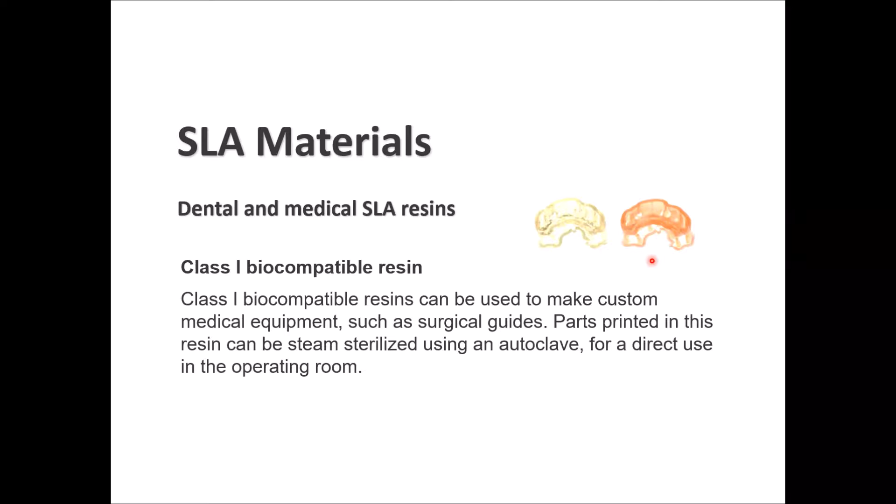This resin can be used to make customized medical equipment like surgical guides, and the parts that we print using this resin are usually steam sterilized using an autoclave so that they can have a direct use in the operating room. We can see here on the right some of the parts printed using the SLA 3D printing technology with the Class 1 biocompatible resin.

The Class 1 biocompatible resin has ups and downs, similar to any material you're going to use in 3D printing. The good side of this material is that it can have high precision when printed, and in addition to the high precision, you have a smooth finish as well, a smooth touch on the surface. The bad side is that it has moderate wear and fracture resistance. So it will not do a good job if your application involves repetitive forces that can cause wear, or impact forces that can cause fracture.

The next material is the Class 2 biocompatible resin. This resin is engineered so that it can handle long-term orthodontic applications. Class 2, also known as Class 2A, is a biocompatible resin. It can be in contact with the human body with no problems for up to a year before this material starts to break down, and before that moment, it's still biocompatible.

The body will not reject it, because when you have a part in contact with the human body or human skin, you want to make sure that the body doesn't fight back against this material as a foreign material. So this Class 2A biocompatible resin can do that job for you, but it has a limitation that after one year it will be degraded.

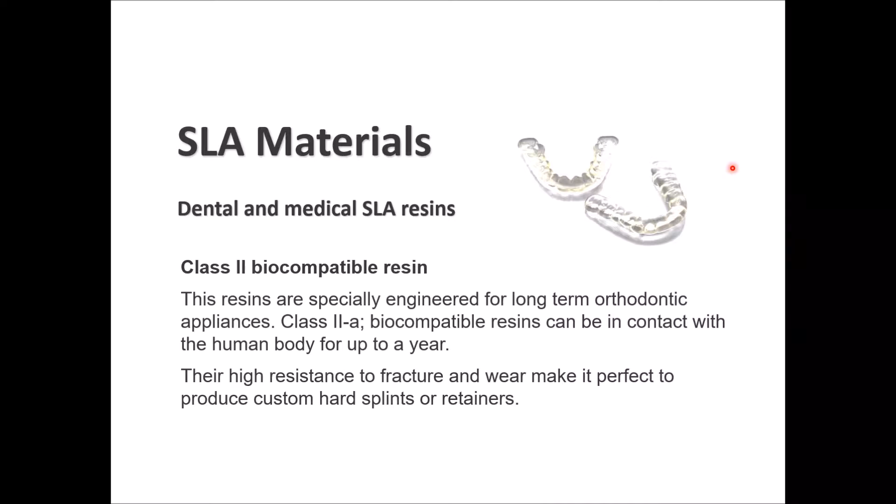The good sides of this material are high accuracy and high resistance to fracture and wear. The downside is high cost. Of course, you can imagine a material like this needs FDA approval to make sure that it's not against the health of the human body, and all these materials are highly engineered with high detail. So this material will be a costly choice.

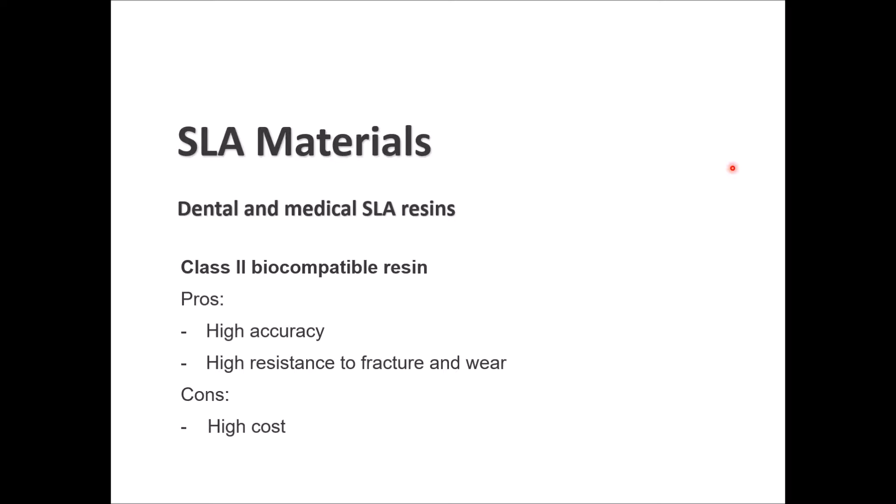If we compare Class 1 versus Class 2 biocompatibility, the Class 1 biocompatibility regulations usually refer to materials that are allowed for the following applications. First, non-invasive devices that need contact with intact skin, and appliances for transient or short-term use, either oral, in the ear canal, or in nasal cavities. It can also be used for reusable surgical instruments.

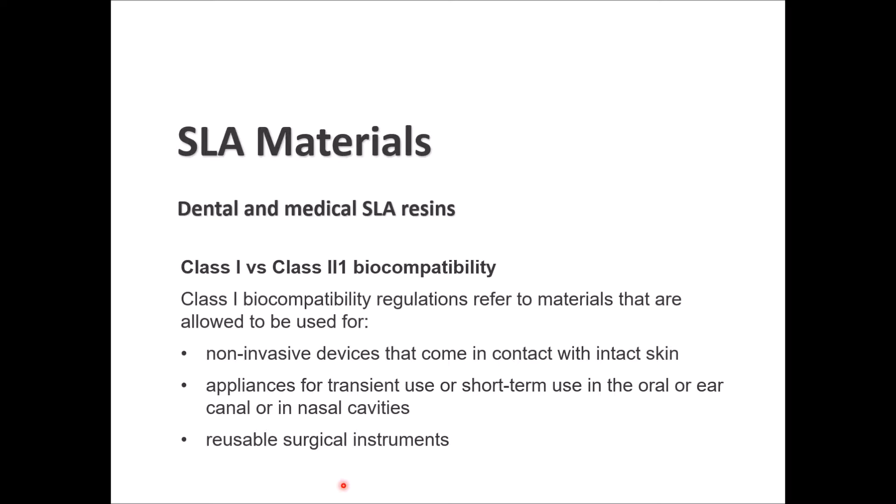For Class 2, the applications are devices that need to contact body fluids or open wounds, and devices used to remove substances either to or from the human body. You can also use it for invasive short-term devices like invasive surgical elements, and for long-term implantable devices placed in teeth.

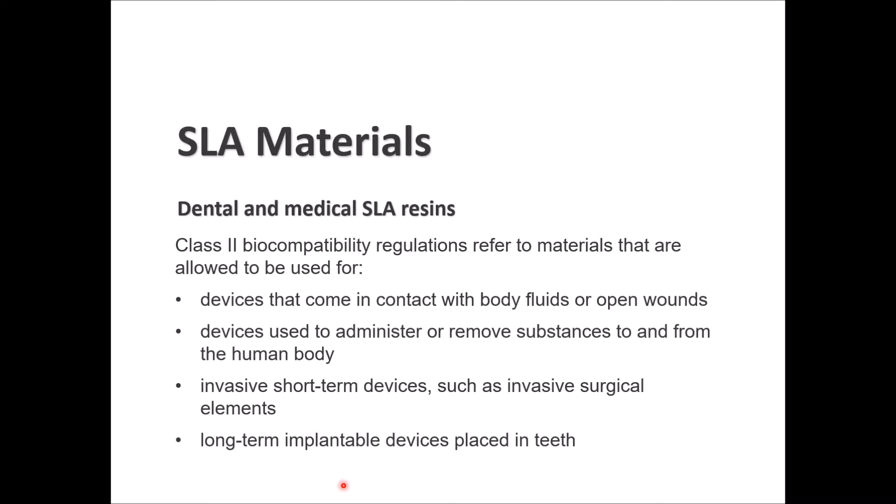The next resin that we'll talk about is the castable SLA resins. These are usually used for jewelry making because this material enables the printed parts to have sharp details and smooth finishes, so they can burn out cleanly without leaving any kind of residue after burnout. The castable resins give you the opportunity to produce parts directly from the digital design so that you can cast through a single 3D printed part. They are suited very well for jewelry and other small and intricate components.

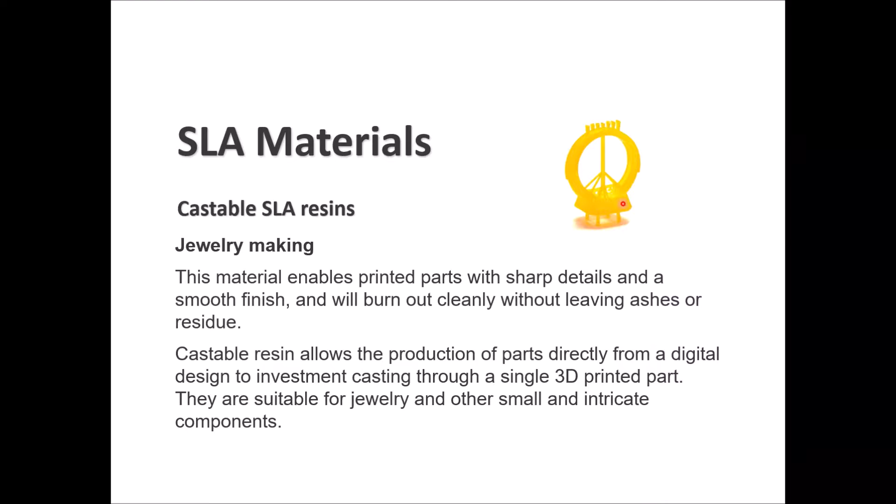So this part here is an early stage 3D printed supported part, a flipped ring with the support materials on it, still not post-processed. This material has not gone through post-processing yet, so it can be a good solution for these kinds of applications to go with the castable SLA resins.

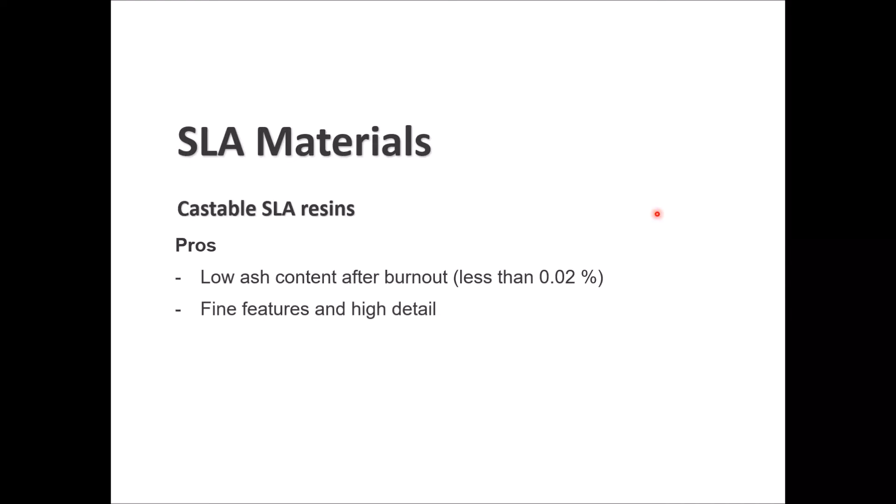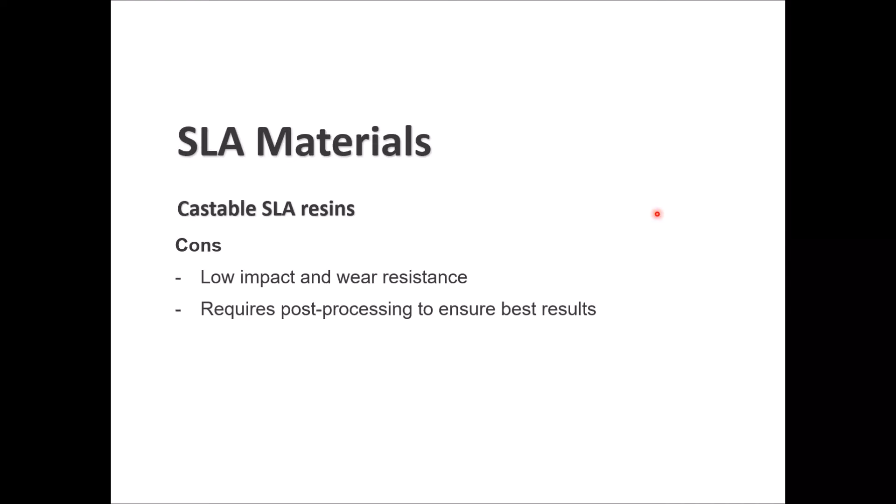The good sides of this resin are that it has low ash content after burnout. It is measured to be less than 0.02%. It can give you fine features and high details. The bad sides are that it has low impact resistance and low wear resistance. It needs a lot of post-processing to make sure you're getting the best results, especially if you're going with jewelry making. So you want to make sure that the part that you're producing as a final shape is aesthetic and visually pleasant.

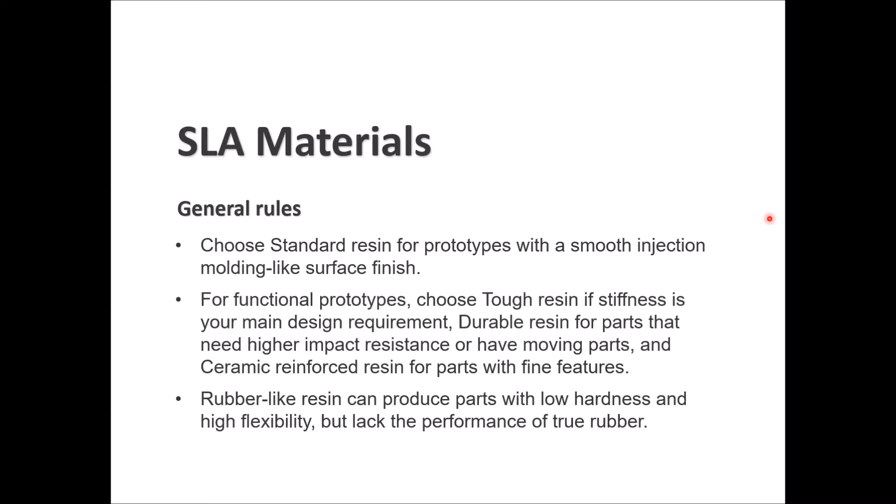Regarding the rubber-like resin, you can produce parts that have low hardness and high flexibility, but you can't get high performance similar to true rubber. It's not 100% similar to rubber and still has its own downsides, as we discussed before. Class 1 biocompatible resins are good if you want external contact with the human body; class 2 biocompatible resins can go for short-term invasive devices. The castable resins leave very little residue and ash content after burnout, less than 0.02%. They're used for jewelry related applications.

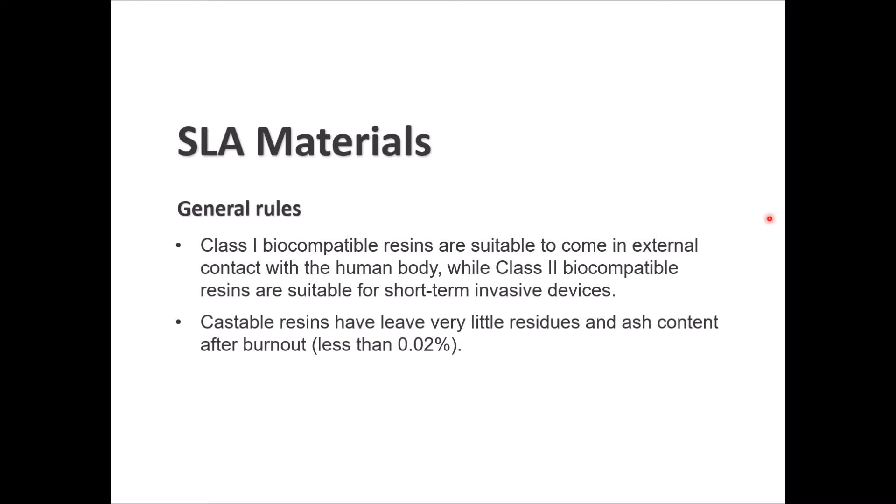Let's go with an overview of the SLA materials and resins that we discussed through our previous lecture and current lecture in terms of the resin type, the description, and the application. So we discussed before the standard resin. It is an ideal choice for high detail prototypes or models that are not going to be functional. It is used for general printing and offers high detail surface finishes with resolution less than 25 microns. These resins don't have any special material properties, and they are considered brittle, even more brittle than the standard FDM material.

The engineering resins are applied for tough, flexible and high temperature applications. SLA resin manufacturers are trying to simulate common engineering plastics, offering ABS or polypropylene-like, flexible and high temperature resins. These resins can give you superior engineering properties without sacrificing print quality, but at a higher cost.

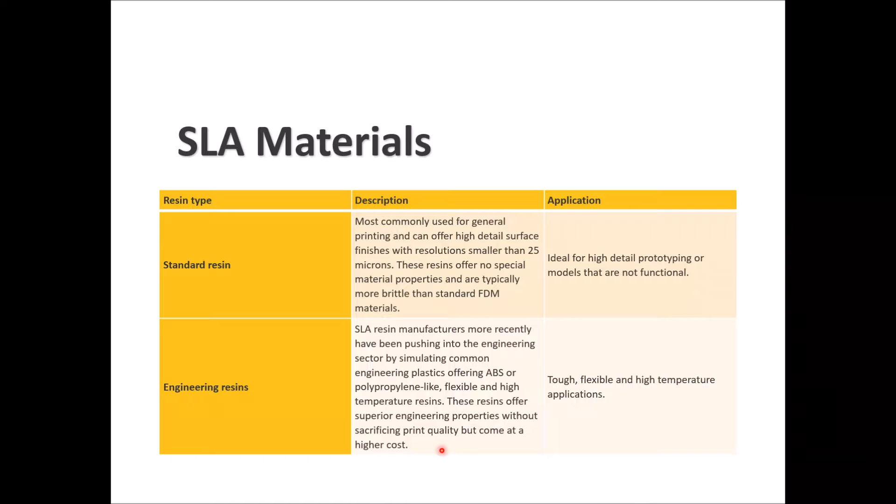Dental resins we discussed briefly a couple of minutes ago. These go for dental and general orthodontic applications, and general purpose resins or castable resins are commonly employed. Class 1 and Class 2 biocompatible resins allow the use of SLA technology to create surgical guides. These resins are considered highly precise and durable enough to be sterilized via autoclaving before surgical use.

For the castable resins, their applications are jewelry, fine detail models, and investment casting. These resins, as we mentioned, have the property of fine detail and delicate feature printing, so they can be designed to allow direct investment casting. They can give you very small details and a minimum feature size of 0.2 millimeters. If properly cured, the resin burnout will leave little to no ash or residue, which is a good side of this material.

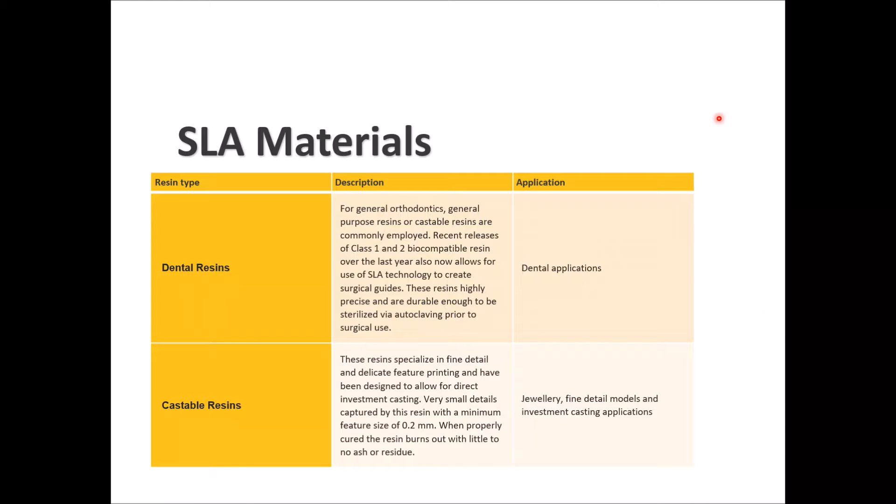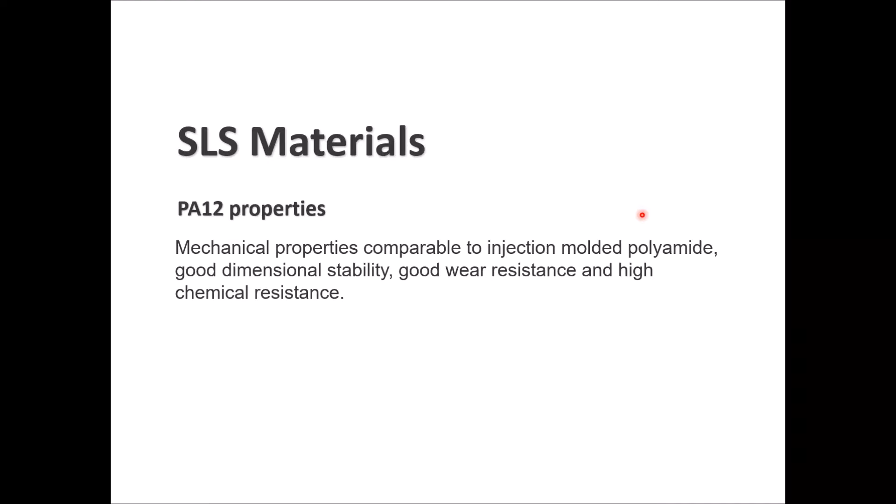So moving from SLA to the SLS materials, we have a material called PA12. The properties for this material, in terms of mechanical properties, are similar to the injection molded polyamide. They have good dimensional stability, good wear resistance, and high chemical resistance. The next material is the PEBA, known as TPA. This material is considered rubber-like, a strong but flexible material.

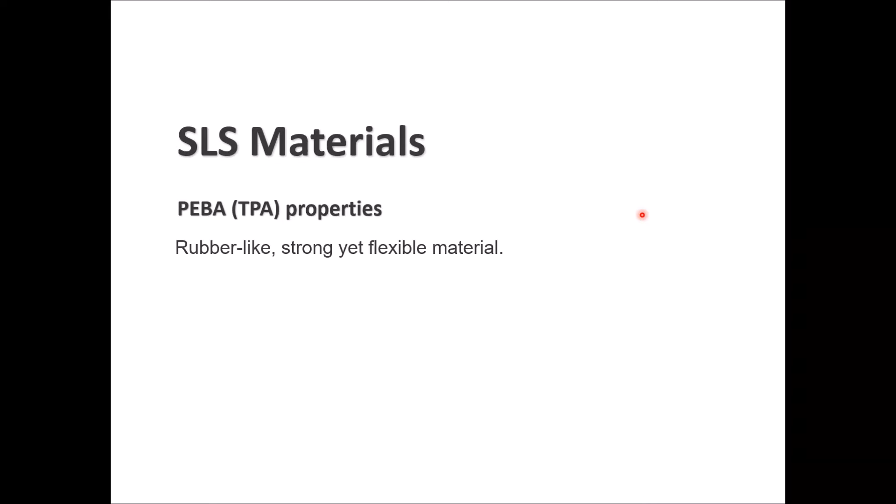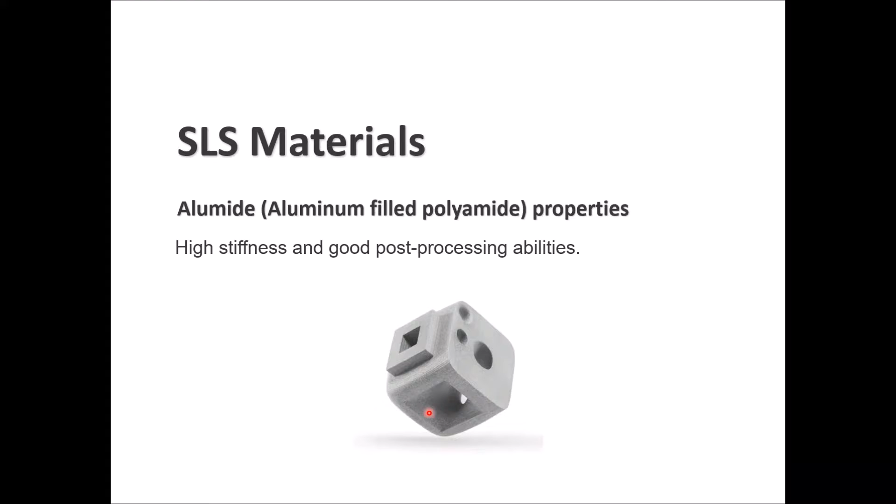Next material is the alumide. It's aluminum filled polyamide. This material has high stiffness and good post-processing abilities. These are materials printed through the SLS 3D printing technology with the alumide material. The 3D part will look something like this in its final form.

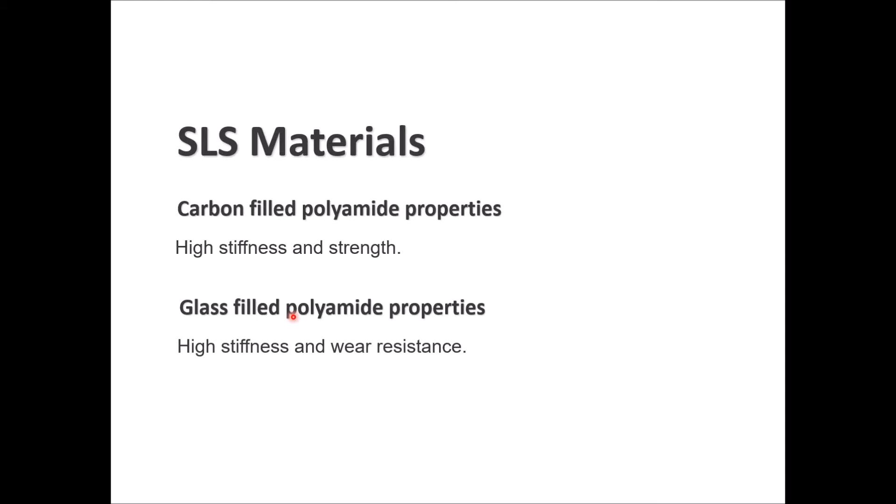We can go with the carbon filled polyamide as well. It has high stiffness and high strength. You can go with glass filled polyamide. The properties for this material are high stiffness and high wear resistance. The PA11 gives you high impact resistance and high elongation at break. It's considered an eco-friendly or environmentally friendly material.

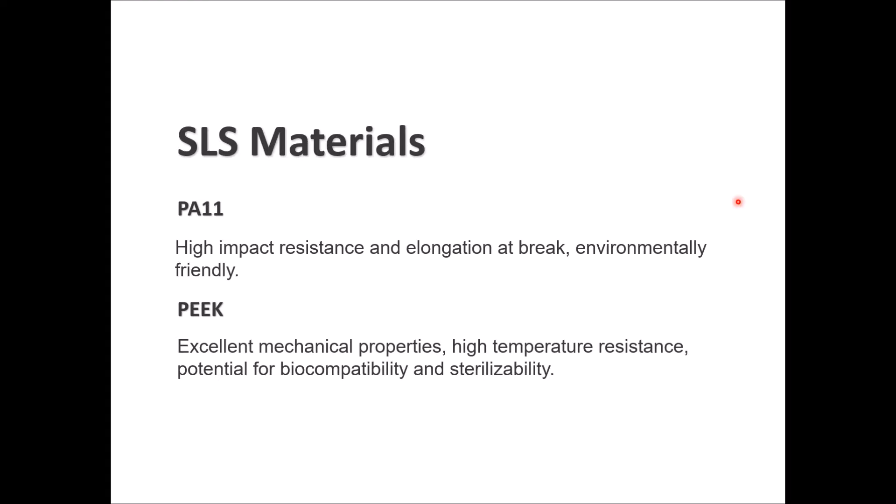For the PEEK material, it's excellent for mechanical properties. It can give you high temperature resistance. It has the possibility to be biocompatible and sterilizable.

For material jetting, these are the materials to choose from if you want to go with material jetting 3D printing. We have here the material type, description, and application. So you can go with the standard material, considered rigid, opaque. The applications for this material are any application that needs high detail, non-functional prototypes, and parts that need to have a very smooth surface.

This material is considered rigid. It is normally opaque in terms of color and transparency. It is available in white, black, gray, and blue. In most cases people consider it as a polyethylene, trying to mimic or simulate the polyethylene properties and visual representation. It's considered brittle compared to the other printing processes.

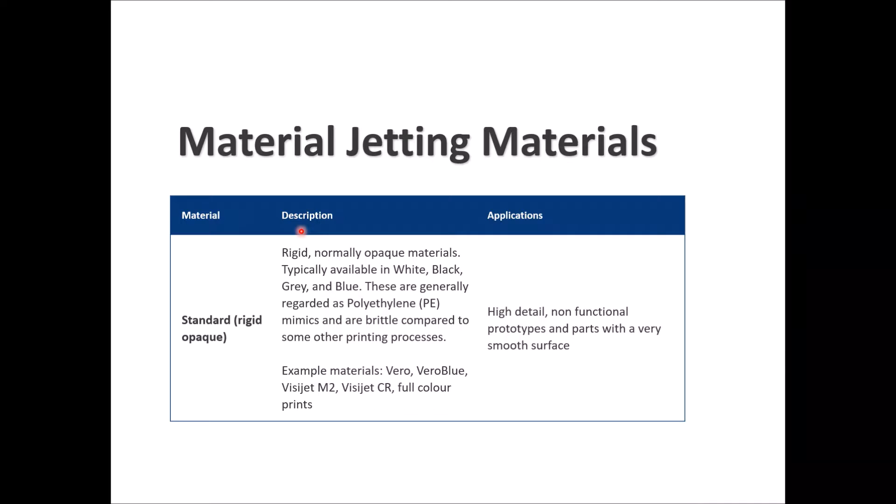This is an example of the standard opaque resin used for material jetting. You can see here the engine body is being printed by that material for representation purposes.

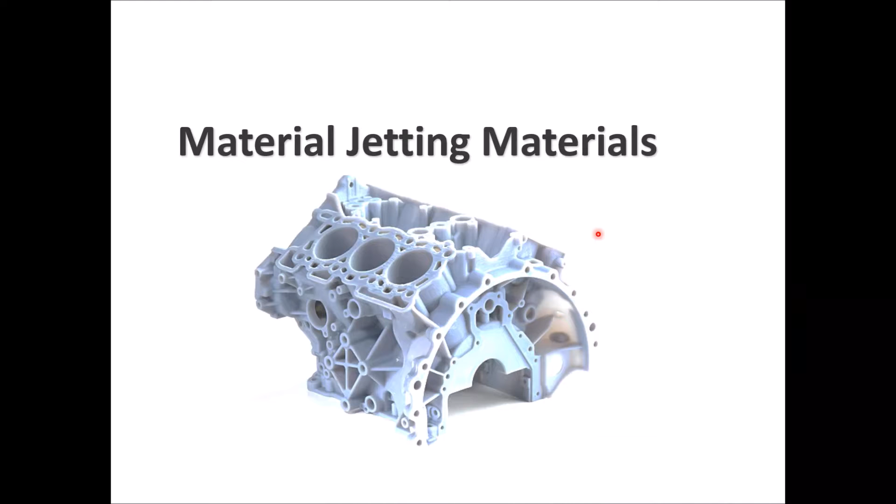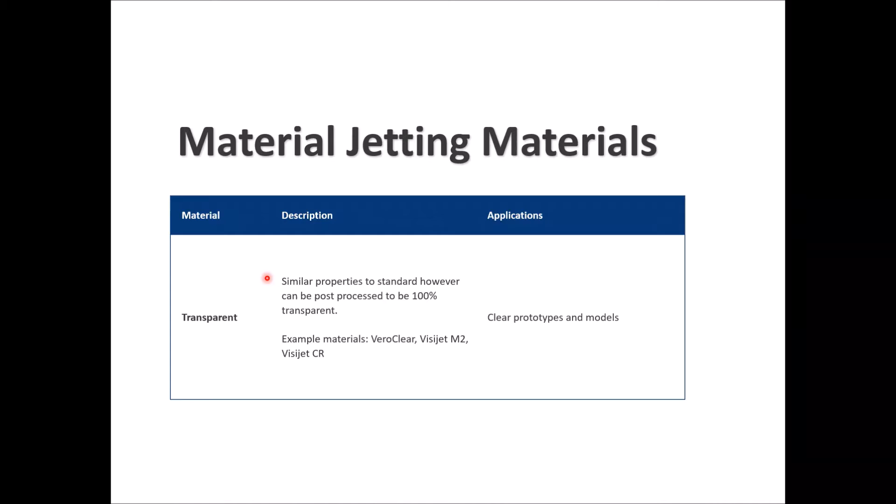Next material is a transparent material. It can be used for clear prototypes and models applications. It's similar in properties to the standard, but it can be post-processed up to 100% transparent. This is a part printed through the material jetting 3D printing technology with the transparent material. It can be very handy for representation purposes and educational applications.

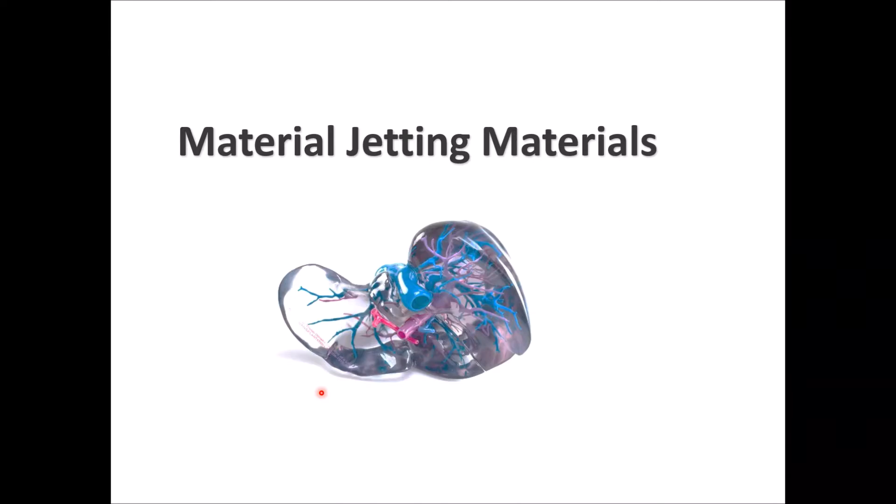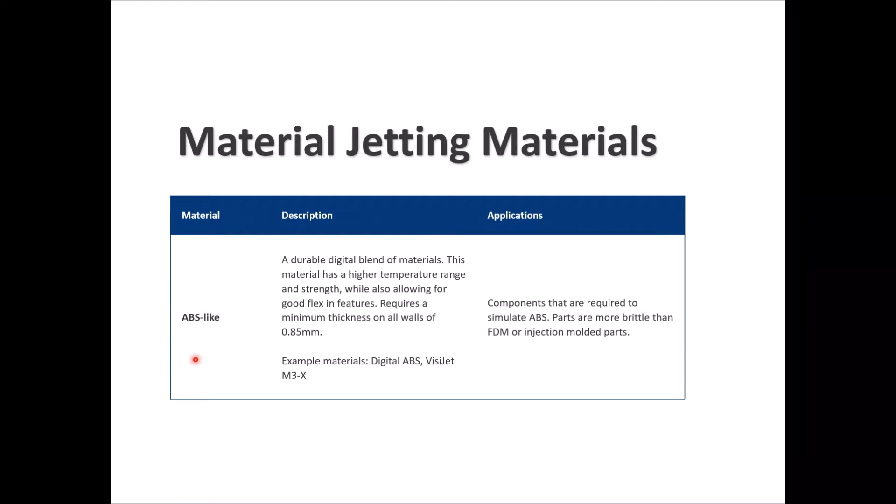There's an ABS-like material. Applications for this material are components that need to simulate ABS. Parts are considered more brittle than FDM or injection molded parts. This material is considered a durable digital blend of materials. It has higher temperature range and strength. It allows for good flexibility in features. It needs a minimum thickness on all walls of 0.85 of a millimeter.

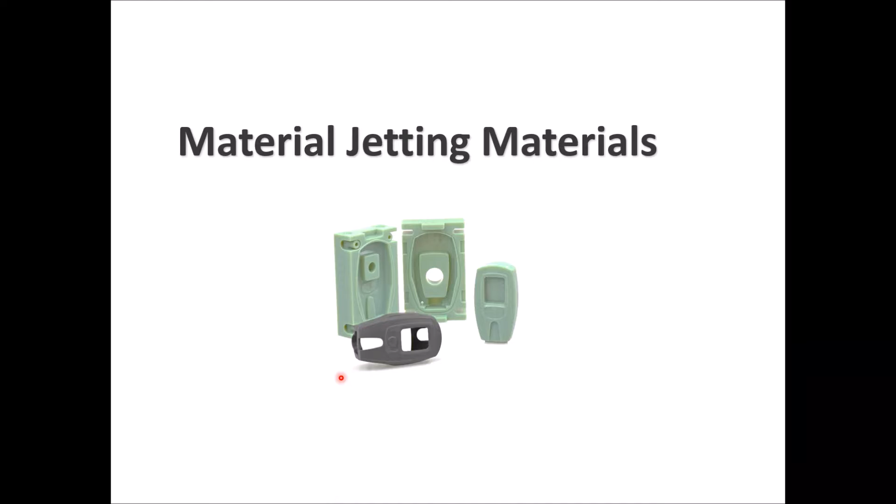These are materials printed through the material jetting 3D printing technology with the ABS-like material. You can see ABS and ABS-like materials always give you this plasticky feeling and plasticky appearance. So that's something to keep in mind based on your application.

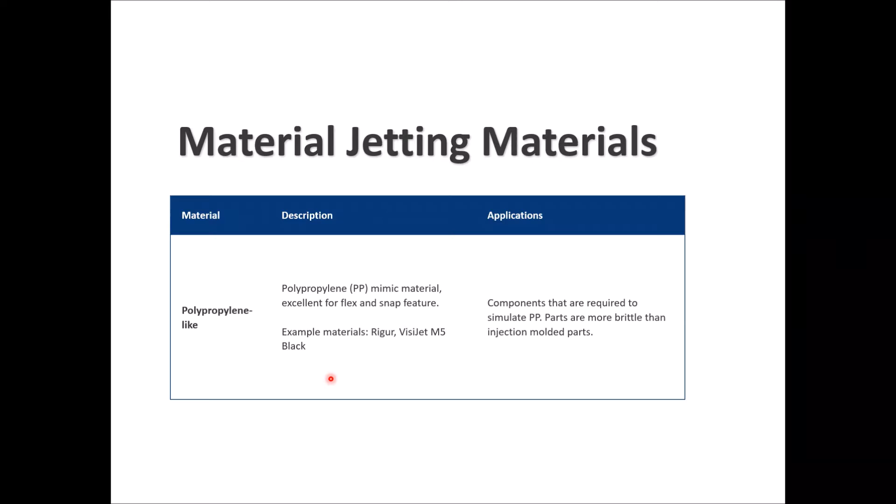Polypropylene-like material. Applications for this material are components that need to simulate the PP material, and the parts are considered more brittle than injection molded parts. So the polypropylene mimic material is considered excellent for flex and snap features.

Flexible material can be used if you are designing for testing and design validation of gasket seals, over molds and buttons. They can be used in parallel with the rigid parts for multi-material design. This material is a rubber mimic material. It can be blended so that it will have a custom durometer, ranging from very flexible to fully rigid material, same as rubber.

The materials focus on mimicking the feel and flex of rubber and are not a good solution for mimicking the elongation or the stretch. But you still can mimic the rigidity and flexibility of the rubber materials that are in the market.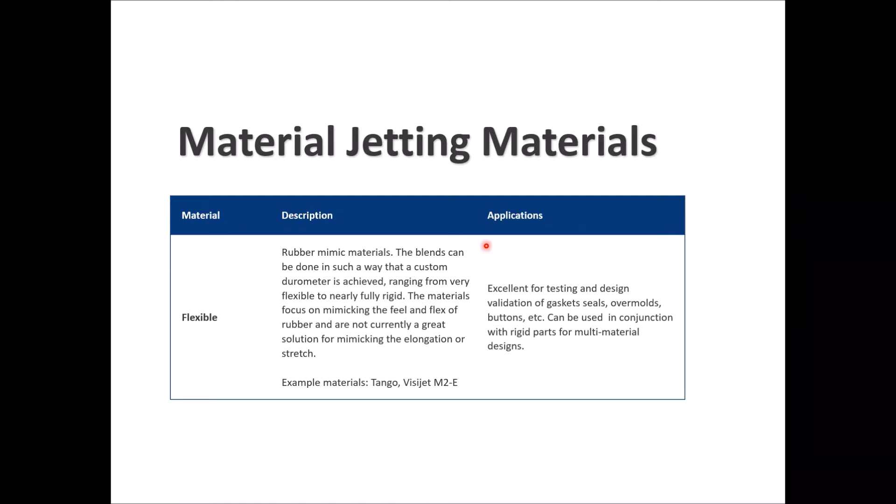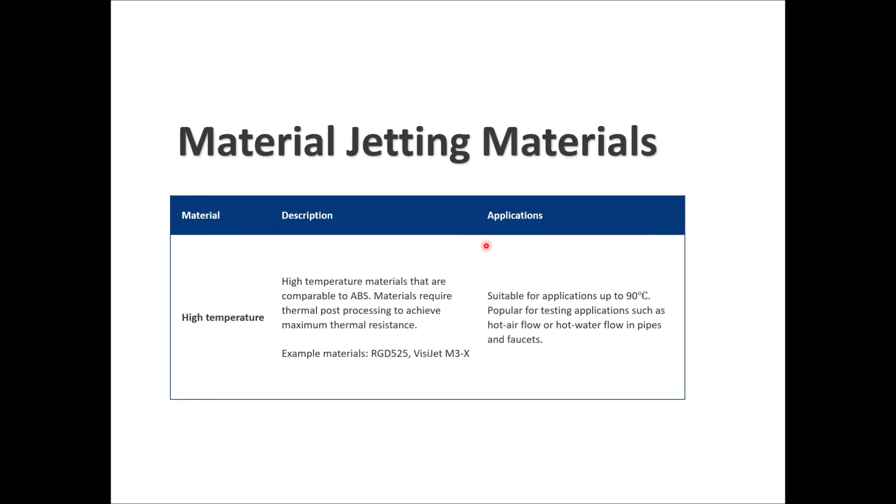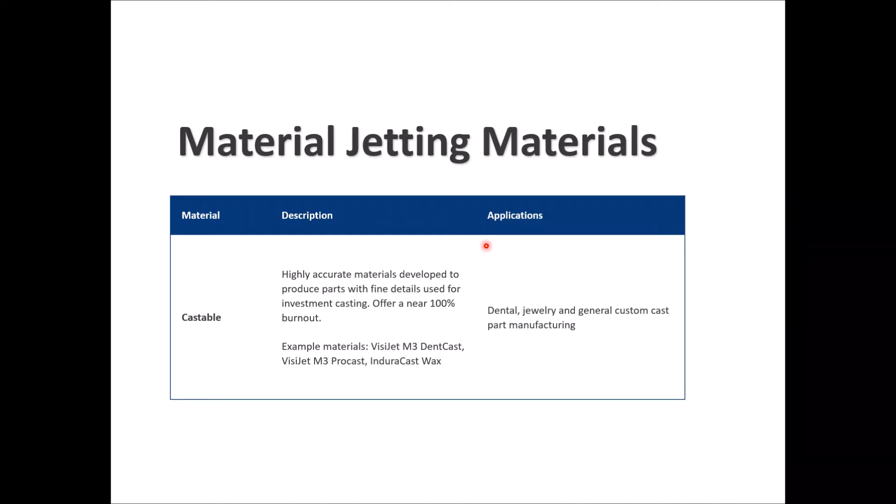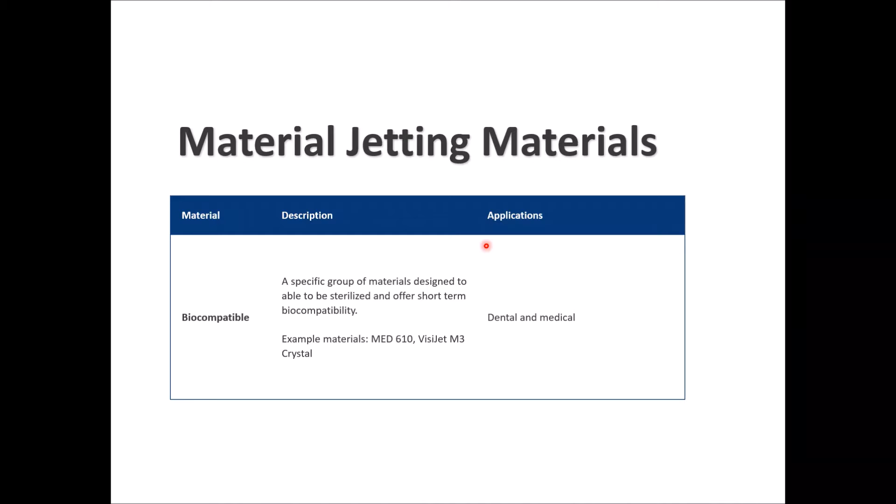In terms of the metal printing materials, if you go with any kind of technologies to print the metals in a 3D printed form, then you can go with the aluminum, known as AlSi10Mg, an aluminum silicon magnesium mix. It can be used for applications in aerospace and automotive production parts.

The description of this material: it is a casting alloy having good strength and hardness. It can be used because it has a good combination of mechanical and thermal properties, especially if you care about the low specific weight in your application. This is a part that's printed with the aluminum material mentioned previously. You can see the quality of the part overall.

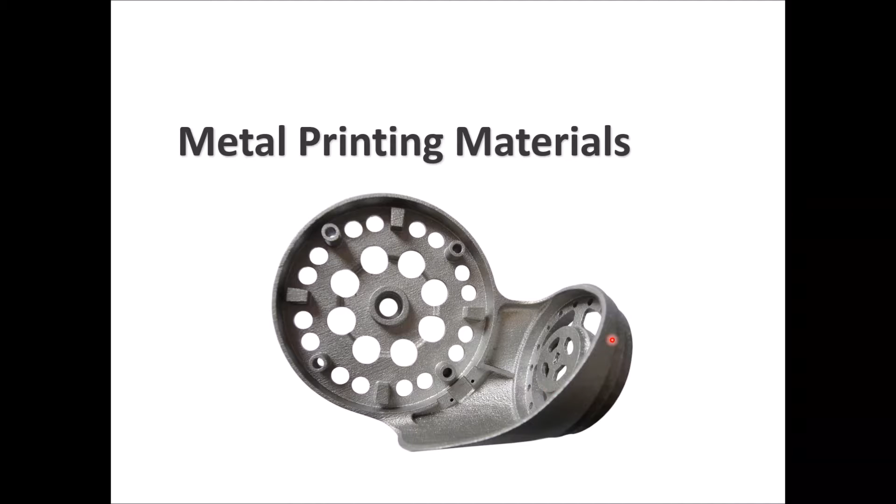The next material is the Maraging steel, which is considered as 18 MAR 300 / 1.2709. It can be used for applications of injection molding tools for series production and other mechanical parts. It's considered a martensitic hardening steel with good toughness, good tensile strength and low warping properties. It can be easily machined, hardened, and welded.

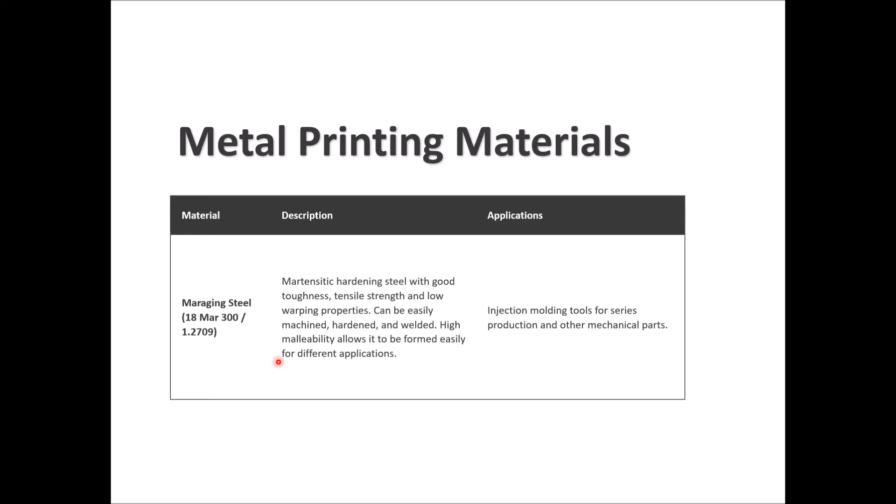It will allow it to be formed easily for different applications. This is a part made with the said material.

Next material is the cobalt chrome, known in coding as UNS-R31538/ASTM F75. It can be used for applications in aerospace, medical implants and production parts as well. It's considered a super alloy with excellent wear and corrosion resistance. It has very good mechanical properties if your application involves high operating temperature.

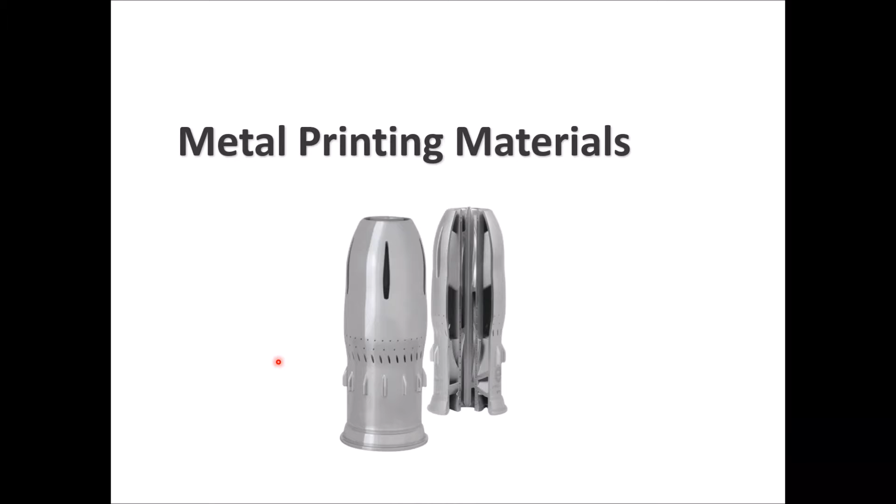It has wear resistance, corrosion resistance, and biocompatibility, which make it very good for surgical implants and high wear applications. This is a part printed using this technology, using the cobalt chrome material. Next one is the stainless steel 316L.

It can be used as well for aerospace and medical surgical tools applications and production parts. It's considered an austenitic chromium nickel alloy with high wear and high strength resistance. It's very good with high temperature operations, and it can keep its strength during these high temperatures. It has formability and weldability.

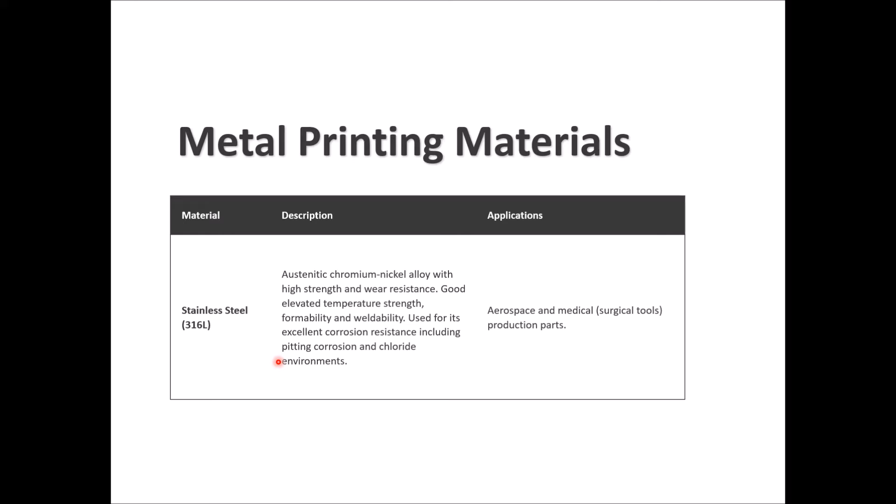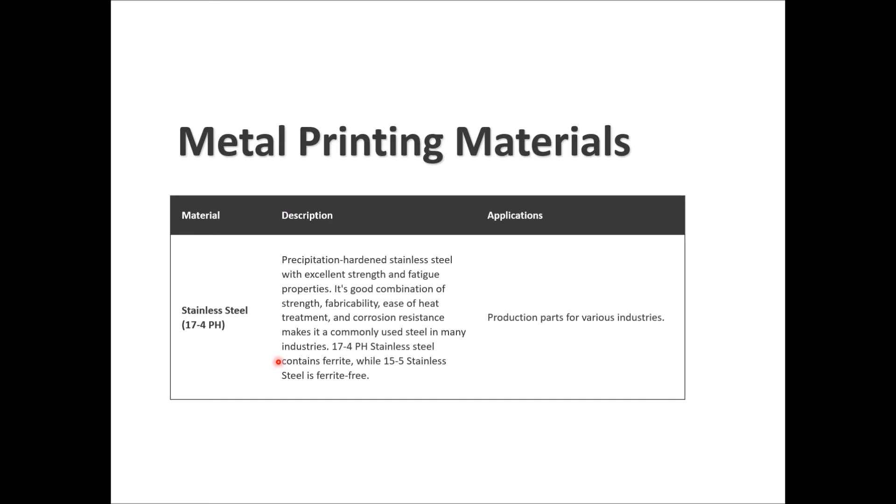For the stainless steel 17-4PH, the application is production parts for various industries, and similar to the stainless steel mentioned before, it can give you good strength and fabricability. It can be heat treated, and it gives you corrosion resistance, which makes it a good choice for a lot of industries. This is a part printed with that material.

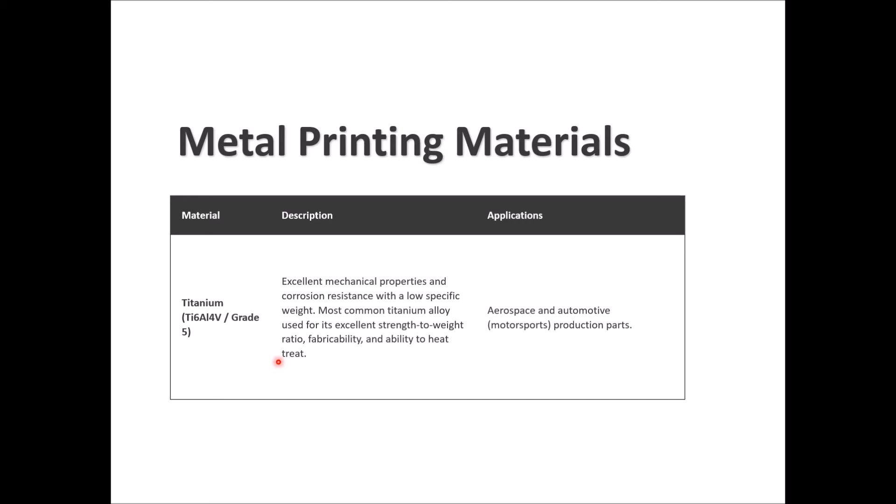The next one, which is a famous one in the industry, is titanium, especially in medical, aerospace and automotive applications. It is the titanium Ti6Al4V grade 5. It is an excellent mechanical material that has corrosion resistance and low specific weight. It's used mostly because it has an excellent strength to weight ratio. It is fabricable, and it can be heat treated as well. This is a part printed using that material.

The next one is the titanium Ti6Al4V, same code as the first, but grade 23 instead of grade 5. It can be used for medical implants and production parts. It's considered an excellent mechanical material that has corrosion resistance and low specific weight. The strength to weight ratio is high, fabricability is valid, and it is a biocompatible material.

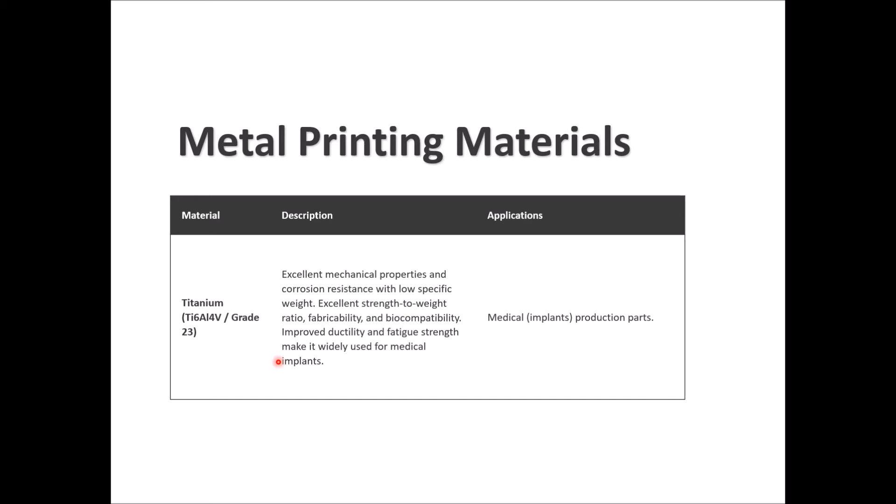It's used a lot in medical applications. It can give you improved ductility and fatigue strength, which makes it a very, very good choice for a lot of medical applications happening today. This is a part printed using that material and metal printing technology.

The next one is the nickel alloy Inconel 718 / UNS N07718. It is used for aerospace applications, especially in high temperature turbine components. It can even be used for aerospace production parts in general.

It is considered a super alloy with excellent yield, tensile and creep rupture strength at high temperatures. It can be used for high strength applications in extreme environments. It has good weldability compared to other nickel based super alloys.

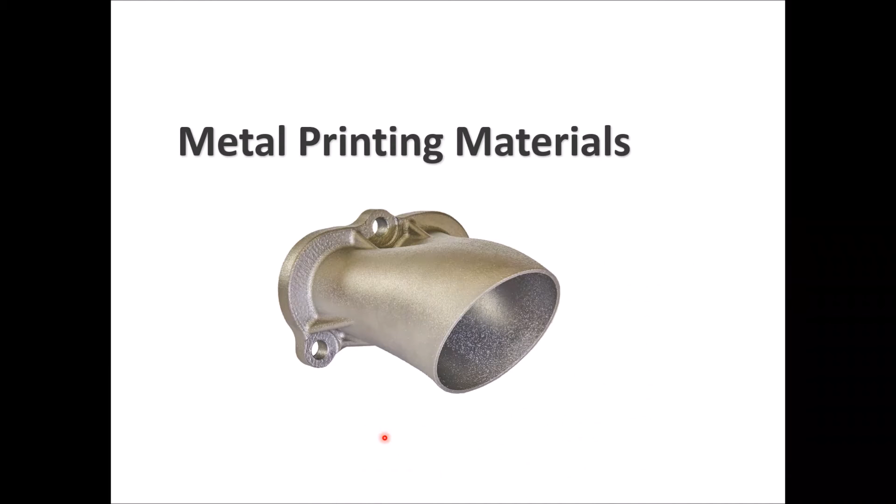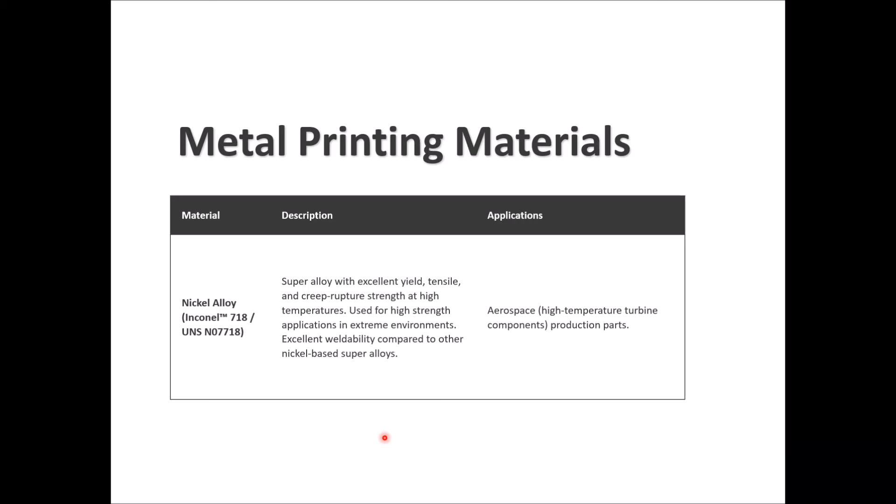For the nickel alloy UNS N06002, or Hastelloy X, the application is production parts in severe thermal conditions and high risk of oxidation, like combustion chambers, burners, and supports in industrial furnaces. It is considered a super alloy with an exceptional combination of high temperature strength, fabricability, and oxidation resistance.

It can be used for high strength applications in very extreme environments. It is considered resistant to stress corrosion cracking, especially in petrochemical environments. It has excellent forming and welding characteristics.

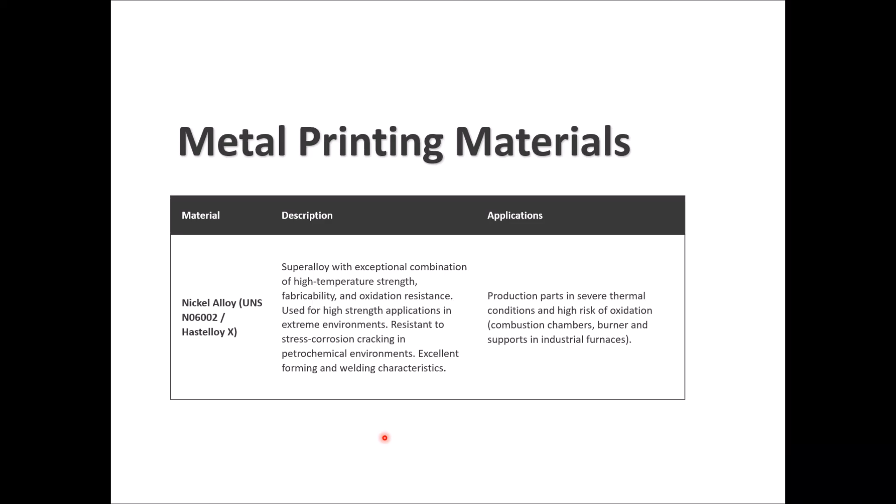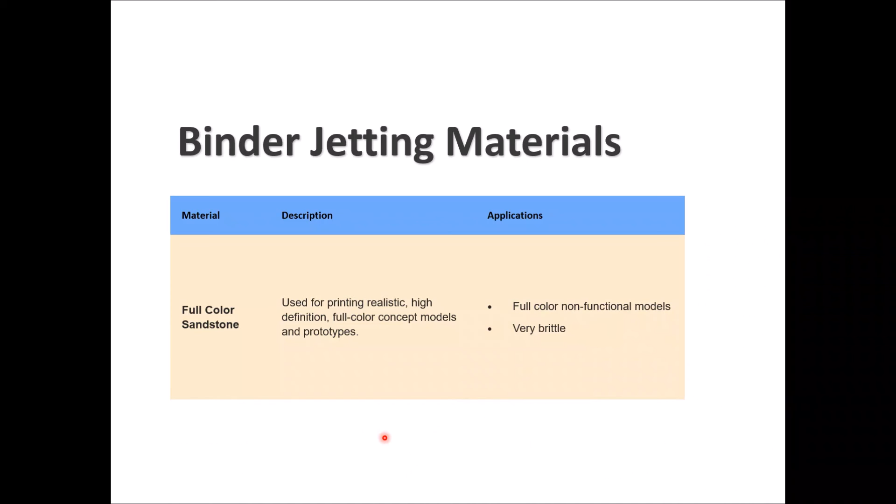For the binder jetting material, we can go with the full color sandstone. The applications are full color non-functional models, very brittle, and it can be used for printing realistic high definition full color concept models and prototypes. This is an example of that material.

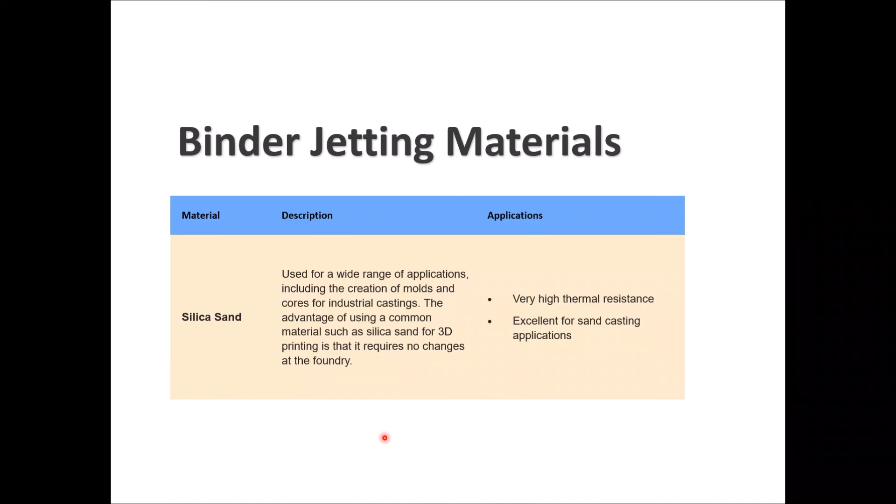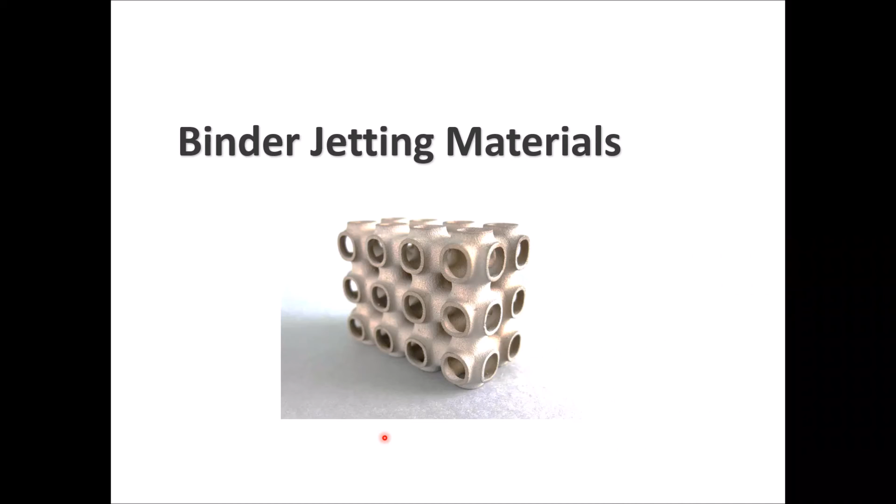For the stainless steel, bronze infiltrated, it has good mechanical properties, it can be machined, with 10% internal porosity. It's stainless steel infiltrated with bronze, a material composed of 60% stainless steel and 40% bronze infiltrant. So this material has a lower yield strength, which gives it machinability and polishability properties. This is a part printed with that material and the binder jetting technology.

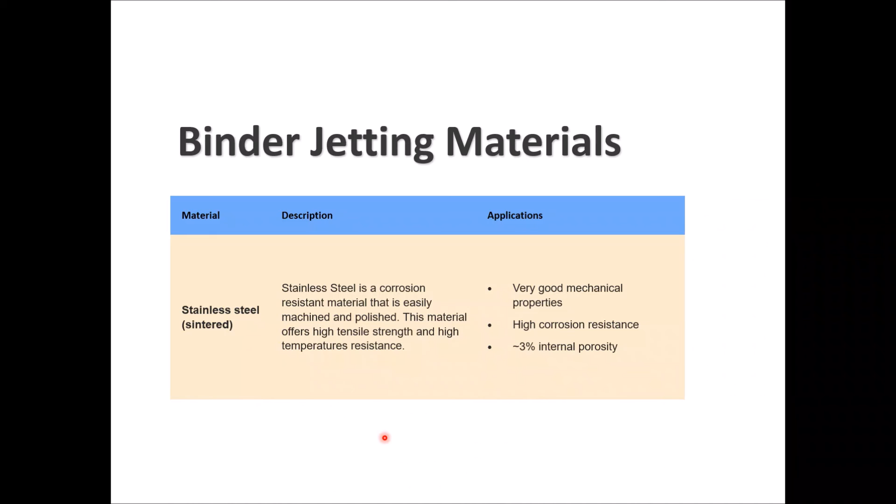Stainless steel that is sintered has good mechanical properties, high corrosion resistance, and 3% internal porosity. It can be easily machined and polished. It gives you high tensile strength and high temperature resistance.

Inconel alloy that is sintered has good mechanical properties, good temperature resistance, and high chemical resistance. This material is a nickel chromium based superalloy, giving you excellent mechanical properties, especially at extremely high and low temperatures. It gives high resistance to oxidation at elevated temperatures up to 1050 degrees Celsius.

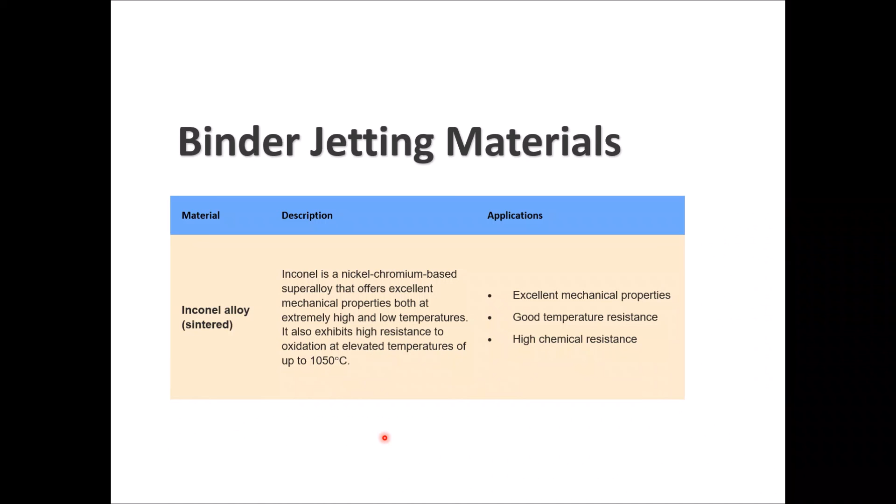The tungsten carbide sintered is a material with very high hardness. It can be used for production applications. It's one of the hardest carbides, with a melting point of 2770 degrees Celsius. It is mainly used for production of high wear resistance abrasives, carbide cutting tools like knives, drills, and circular saws, and milling and turning tools in the metalworking, woodworking, mining, petroleum, and construction industries.

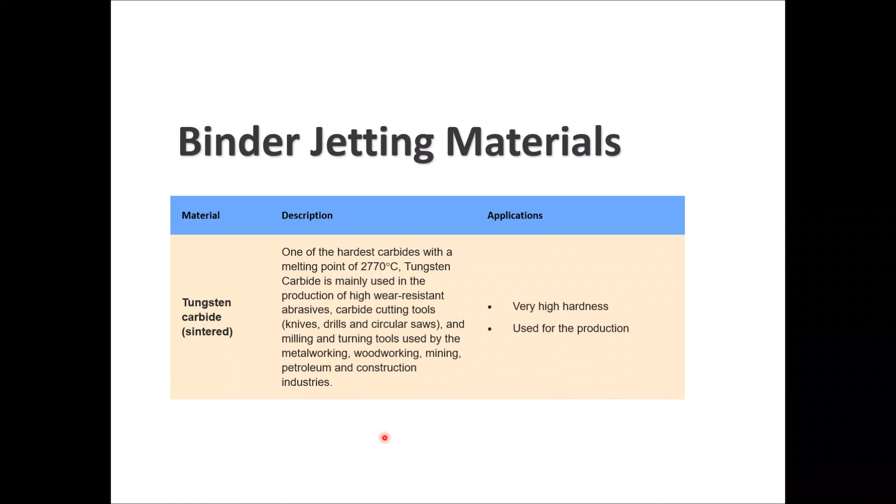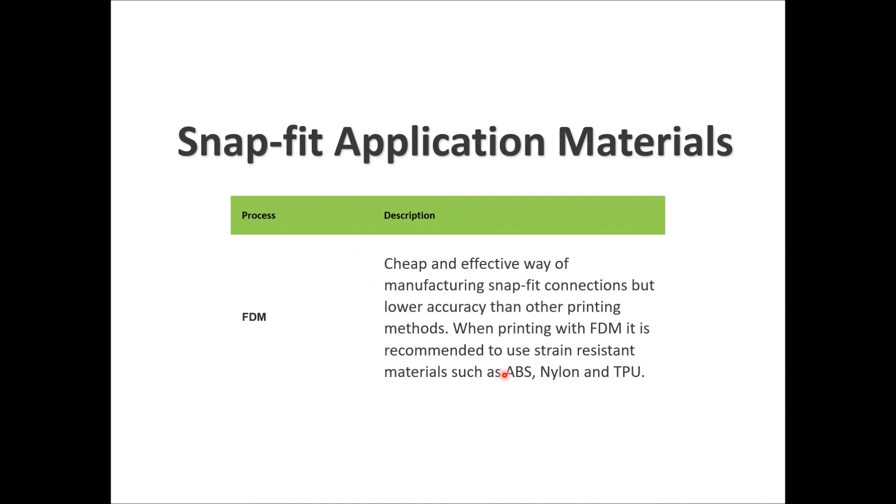Snap fit application materials. So we have here the process and the description of the process. If you want to do snap fits with FDM 3D printing, it can be a cheap and effective way of manufacturing a snap fit, but will give you lower accuracy than other printing methods. If you print with FDM, it's highly recommended to use strain resistant materials like ABS, nylon, and TPU.

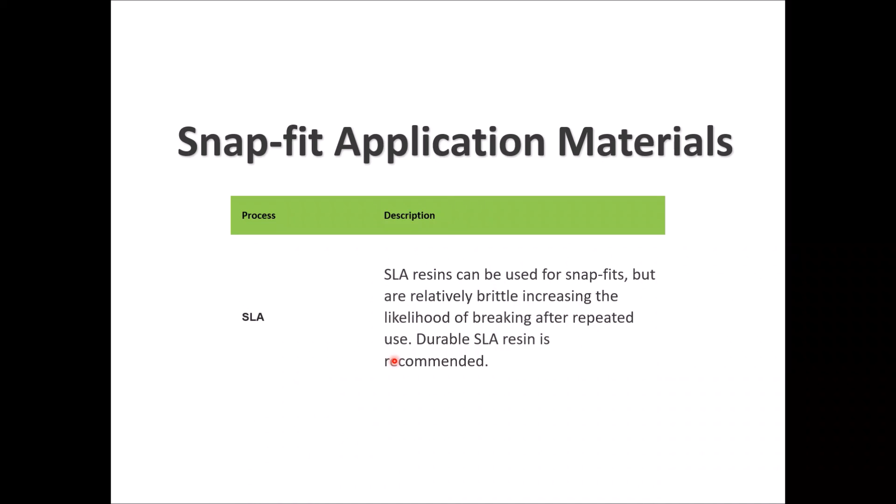If you want to go with SLA 3D printing for your snap fit, SLA resins can easily be used for snap fits, but remember that they are brittle, and with repeated use your snap fit will break after a while. You can go with durable SLA resin for snap fit applications.

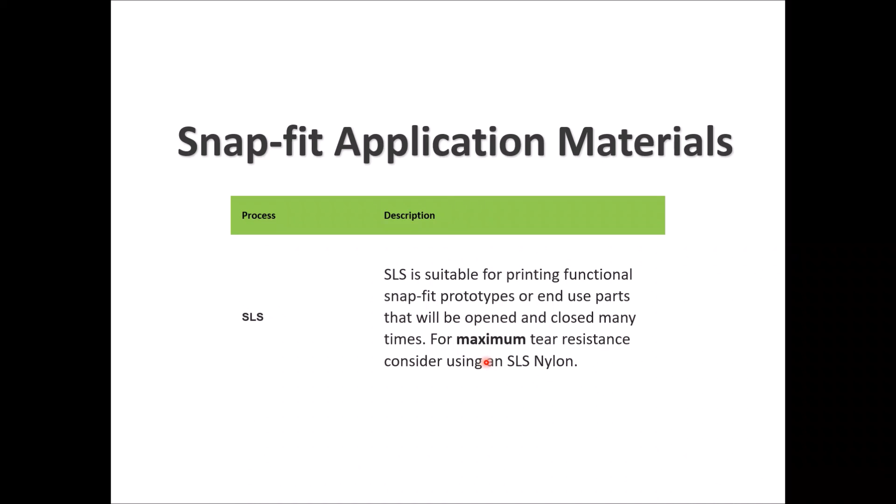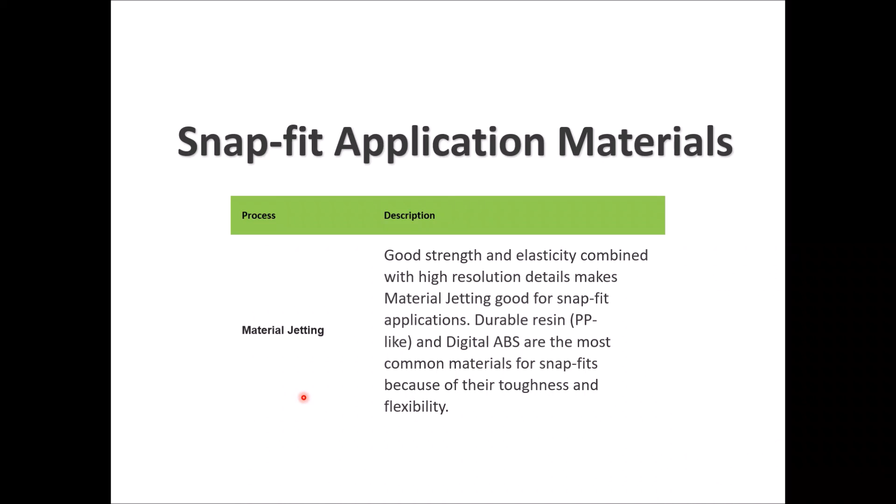SLS 3D printing can give you snap fit prototypes for sure, and it can easily handle opening and closing the snap fit many times. For maximum tear resistance, use SLS nylon. Material jetting gives you good strength, good elasticity, and high resolution details. You can go with durable resin and digital ABS for that kind of application because they have toughness and flexibility.